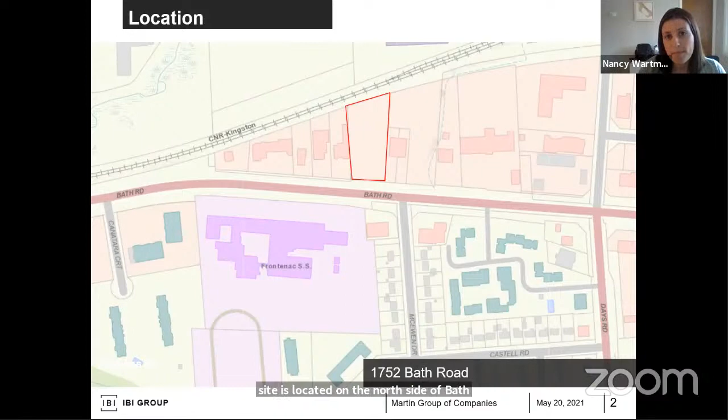In terms of the general area, north of the site is immediately the CN main line with industrial uses off of Development Drive to the north. To the south is Frontenac Secondary School, as well as some commercial and residential development. East and west along Bath Road is generally commercial, with some commercial having accessory residential within it, as well as residential further to the east and west.

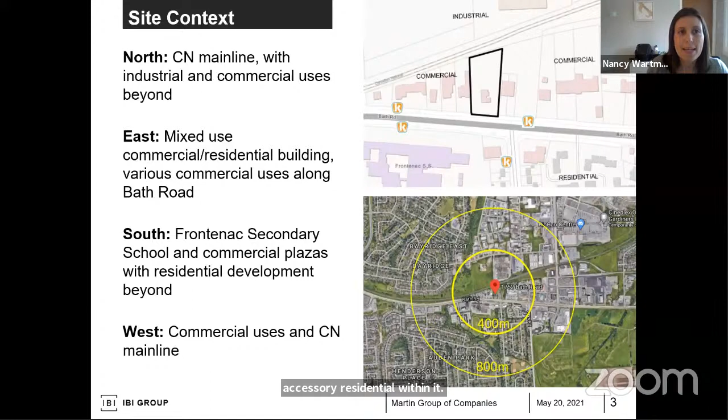This is an old aerial of the site, since the building has since been demolished, but it has an area of 0.6 hectares, about 50 meters of frontage on Bath Road. If you recall, it accommodated the McEwen Animal Hospital for a number of years.

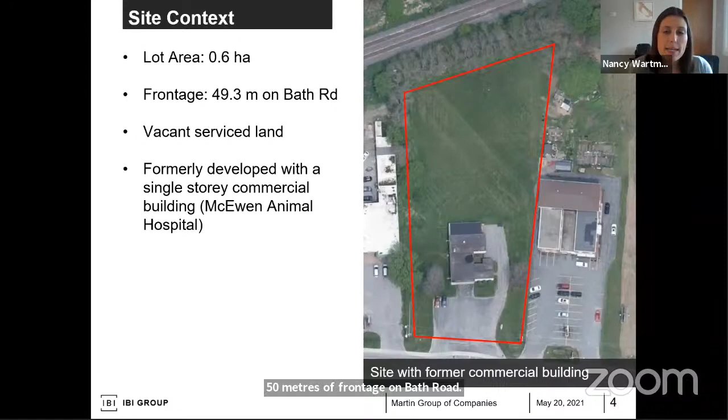The proposal we are looking at this evening is to construct an 8-story apartment building with 88 units, intended to be a mix of market rental and affordable units. 100 parking spaces are proposed in a surface lot, as well as an attached parking structure behind the building. The parking structure is intended to have a garden terrace on the roof, as well as common indoor amenity areas and private balconies. Due to the proximity to the CN main line, there is a safety berm proposed at the rear of the property as required by CN.

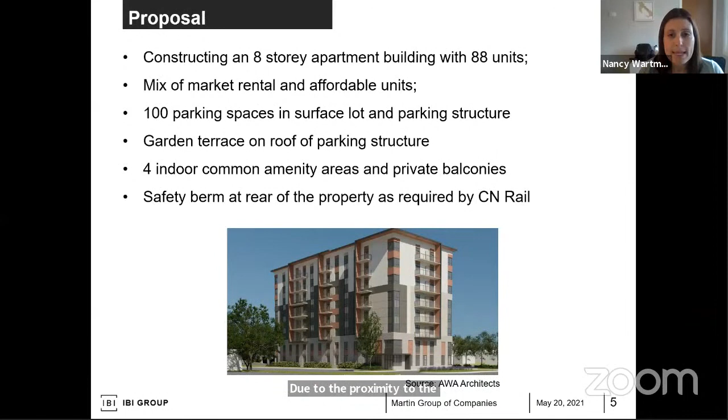In terms of amenity space, we're meeting the zoning requirement of 18.5 meters squared per unit. Landscaping on site will be 41%, lot coverage 30%, parking ratio of 1.15 per unit, and an indoor bike parking storage room with 30 secure spaces is proposed within the building.

I know there was some chatter before the public meeting started with the councillors looking for some more information on the proposed affordable housing component. So I'll provide you with what I know, and after my presentation, if there's further questions, hopefully myself and Andrew can do our best to address them. But the project goal is to successfully bring affordable housing units to the market in the city of Kingston.

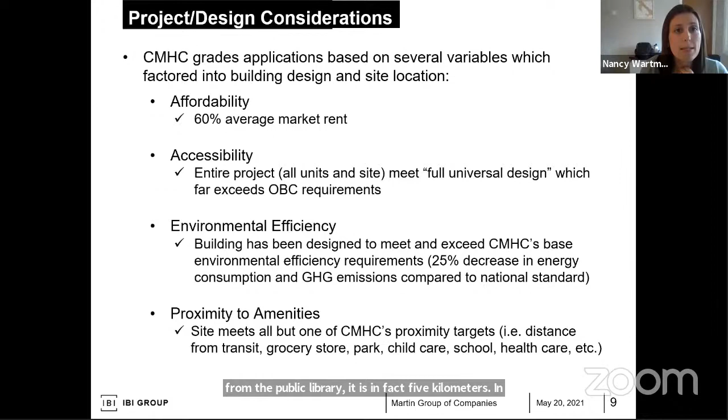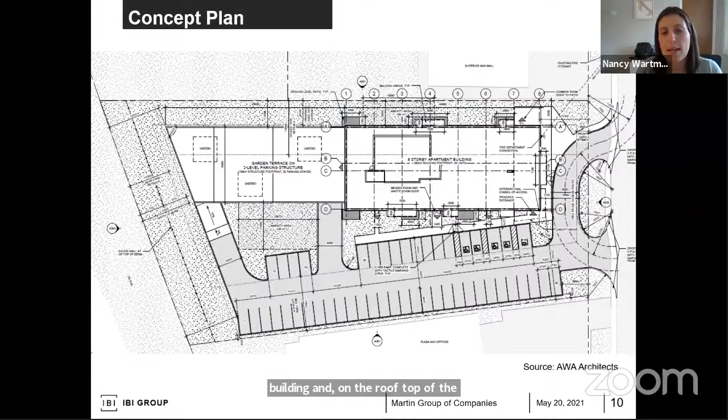Moving now to some more of the planning details in the concept plan. You have Bath Road on the right-hand side of your screen, and the CN main line right of way on the left-hand side. You've got your 8-story apartment building with access off of Bath Road. There's a surface parking lot in the west side yard, as well as a 2-level parking structure located behind the building. On the rooftop of the parking structure there will be a garden terrace for use by the residents, as well as additional indoor common amenity space.

These are the side elevations of the building. There you can see the parking garage a bit better. Again, it will be located behind the building, so it won't be visible from Bath Road.

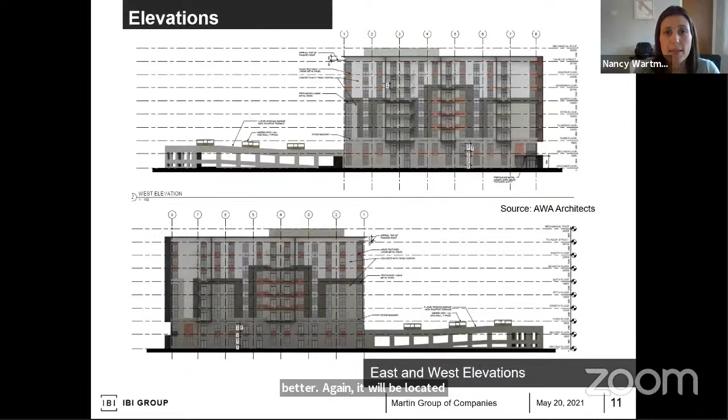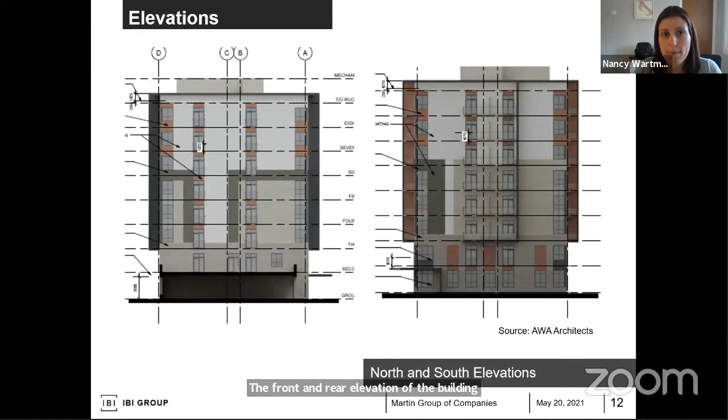As part of the planning report, we did complete an urban design review looking at the development in relation to the design guidelines for residential lots prepared by the city. The apartment creates a more defined urban environment in the area. The design is supportive of CPTED principles, or safety principles. As I mentioned, it will be universally accessible. The height and massing are similar to nearby development.

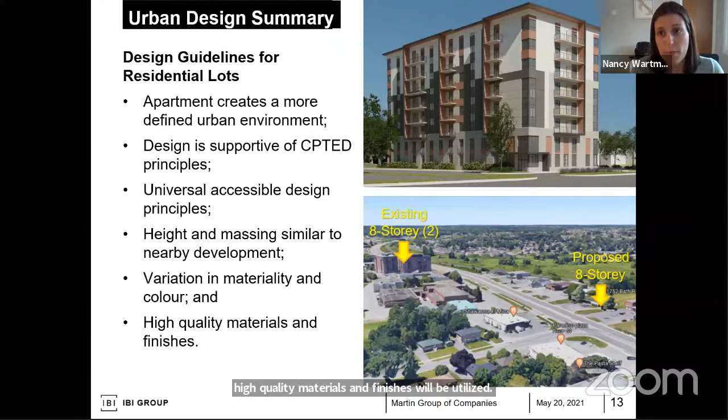The second image identifies, if you're familiar with the area, 2 8-story buildings just west on Canatera Court, as well as a large number of residential buildings up at the intersection of Bath Road and Gardiners, as well as other multi-story residential along Days Road. As you can see in the rendering, there is a variation in materiality and color, and high quality materials and finishes will be utilized, with part of that being required to meet the building efficiency requirements that Andrew's hoping to meet for CMHC.

We're requesting a zoning bylaw amendment to permit the multifamily apartment dwelling and to establish site-specific performance provisions for it.

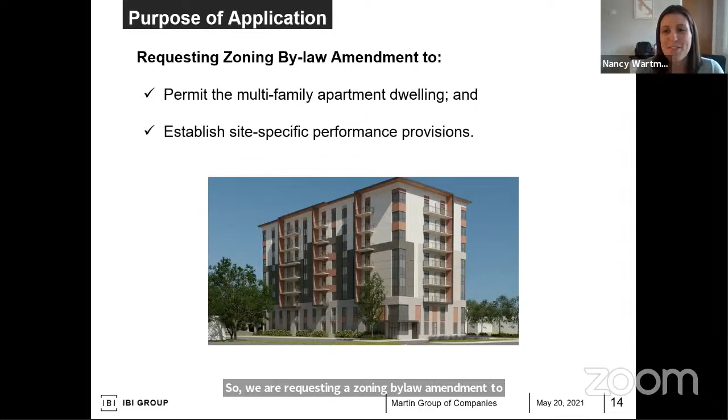The planning application needs to be consistent with the intent of the 2020 PPS. In this case, it redevelops an underutilized site in an area intended for development. It's within the urban growth boundary. It efficiently uses land and resources, does not result in uneconomic extension of services. It's compatible with adjoining uses as demonstrated by the accompanying technical studies, and no public health and safety issues are anticipated.

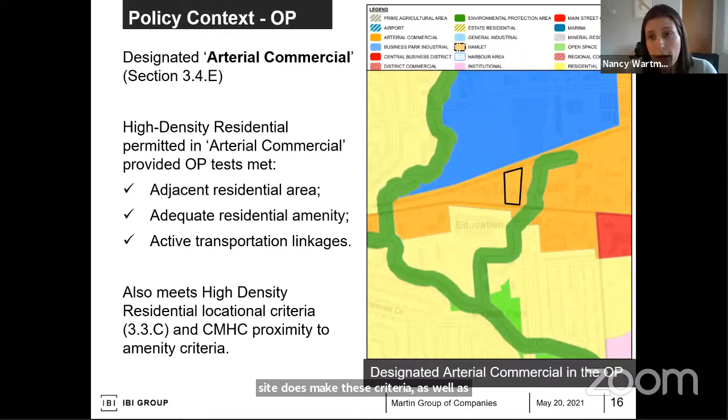Moving now to the local City of Kingston OP, the site is designated arterial commercial. High density residential uses are permitted in the arterial commercial designation, provided the tests of the OP are met, with the test being adjacent to residential area, adequate residential amenity, active transportation linkages, and as outlined in our planning report, the site does meet these criteria, as well as the high density residential locational criteria and the CMHC proximity to amenity criteria that I described earlier.

Just looking at some of the OP policies specifically, the site is compatible with adjacent uses. It is south of the industrial area off of Development Drive, but it does meet the ministry's D6 guidelines for residential uses and the minimum separation distance.

Utilizes mitigation measures as described through the noise study that will be required to ensure compatibility. There are a mix of commercial and residential uses along Bath Road, including accessory residential within some of the commercial buildings. Mitigation measures are utilized as necessary.

A detailed noise study was completed. And actually, even prior to submission, there was extensive back and forth with the City of Kingston, and it has already gone through a peer review process, or an initial peer review process. And as we move through the technical review process, it will obviously be reviewed in greater detail as well.

The site meets the needs of its users, and it does satisfy the special needs facilities policies outlined in the OP. As I mentioned, based on who the previous partnership was with, the proposal would fall into this description. So in the event that another organization comes through with similar goals, we still speak to the policies.

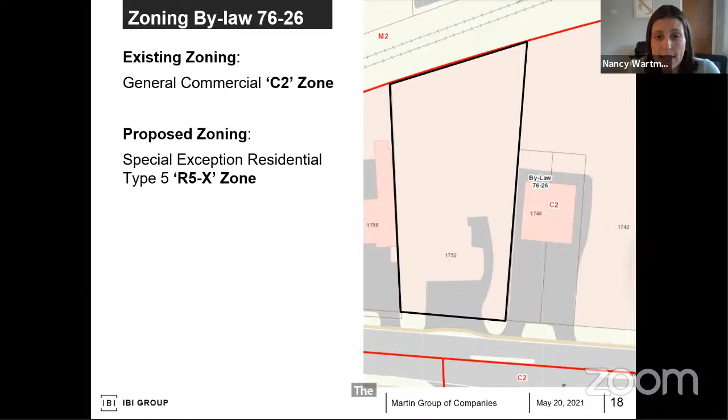Some of the standards that we've requested to amend within that new R5 zone is to permit the proposed community support office, reduce the minimum required lot area, which is on a per unit basis, a reduced east side yard setback, a reduced setback from the CN rail main line, a reduced parking ratio from 1.25 to 1.15, adjustment of yards where parking is permitted, as well as privacy yards, existing driveway widths, and to increase the permitted projection for balconies into the east yard, given the reduced setback proposed.

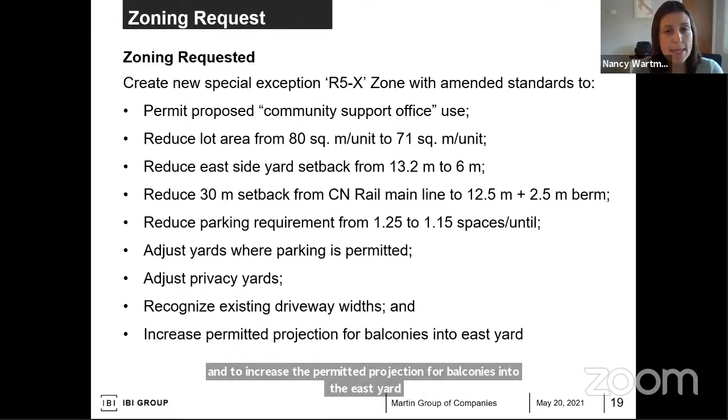So just to generally summarize and speak to some of the reasons that the requested relief is appropriate: the Arterial Commercial designation does permit residential development. The relief for the community support office has really been incorporated for clarity.

With the office being located on the second floor, it will just be one of the units that will then be converted to meet the needs of the organization who's operating. The lot area is sufficient to meet the needs of site users in terms of setbacks, unit sizes, parking, amenity, and safety. The east side yard and balcony setbacks are appropriate given the suburban/commercial context, and they are still a sufficient size to accommodate landscaping and access to that part of the property.

The CN rail setback, which is 30 meters in this case, because we have the parking garage at the rear part of the building, hence the request to reduce down to 12.5 meters. However, the residential component is greater than 30 meters - I think it's actually 48 and a half meters, which actually exceeds the requirement by CN. This has been reviewed with CN, and as necessary, the safety berm will still be installed.

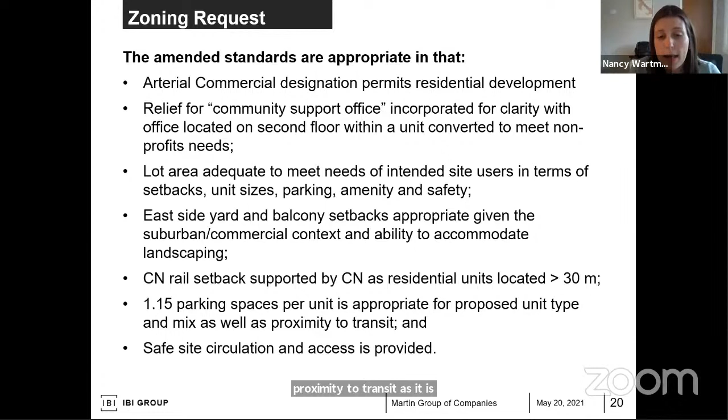So to summarize, the requested amendment is appropriate in our opinion, as it's consistent with PPS policies, conforms to the intent of official plan policies, and is compatible with surrounding land uses. It's our opinion that it represents good land use planning and is in the public interest.

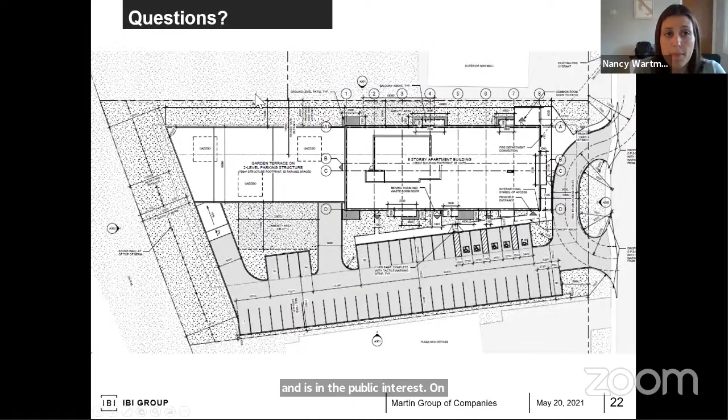On that note, if you want to go to the next slide, I'd be happy to answer any questions from the committee. And as mentioned, Andrew's here as well, and he may chime in if there's something he's better suited to answer.

Thank you very much for your presentation. Before we go into the committee, I'll just ask for, I believe it's Mr. Park, but whoever the city planner is, to comment on the public information notices.

Yes, Ms. Grant. Hi, Mr. Chair, can you hear me okay? We can indeed. Perfect. So just to confirm that notice was provided on this application in accordance with the requirements of the Planning Act, which includes on-site signage, a mail out, and a courtesy notice in the paper. To date, we have not received any public correspondence on this application.

Thank you very much. I will now turn to the committee, and we'll give committee members an opportunity to ask questions at this time. And then at the end of that, we'll move to the public. So, any questions from the committee?

Yes, Councillor Hill. Well, I just want to start by congratulating Andrew for this project. This is great. This is exactly what we're looking for in our community, and I hope you're able to secure that investor, that partner that you're looking for.

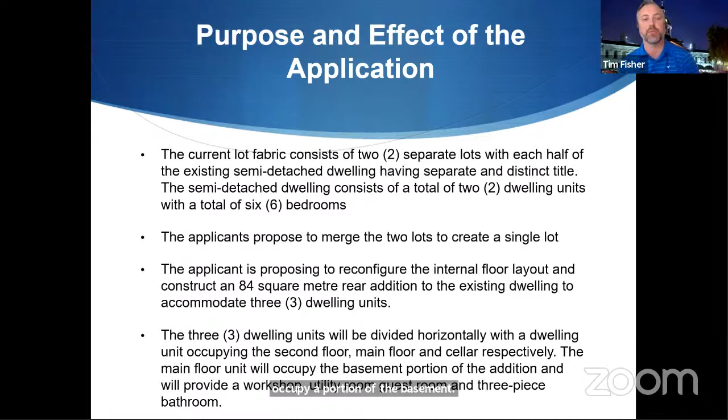Next slide. The proposal will consist of 3 units, with the basement unit containing 2 bedrooms, the main floor unit containing 3 bedrooms, and the 2nd floor unit containing 2 bedrooms, for a total of 7 bedrooms in the new structure. The proposed 3-unit dwelling will increase the total bedroom count from 6 to only 7 bedrooms.

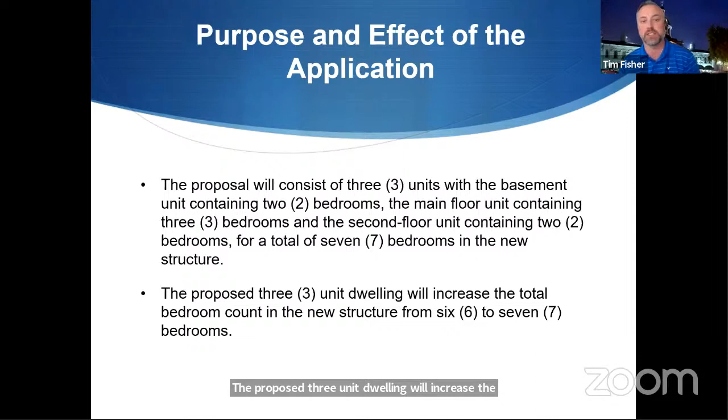Next slide. The proposal will comply with the performance standards of the 1 and 2 family dwelling A5 zone in zoning bylaw number 8499. However, a 3-unit dwelling is not a permitted use in the A5 zone. So the applicant is seeking a site-specific A5 zone, which will permit a 3-unit dwelling as a use and recognize the existing lot area of 107 square meters for the 3 dwelling units.

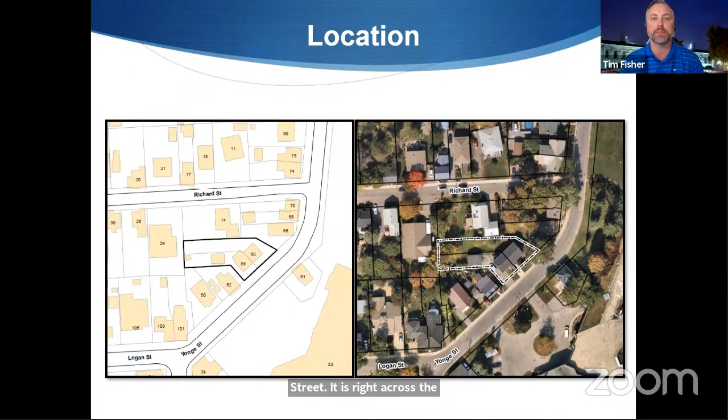Next slide. The location of the property, as you can see, is along the northwest portion of Yonge Street. It is right across the street from Portsmouth Olympic Harbor and just a stone's throw away from King Street West. It is located on the outskirts of a residential neighborhood, which consists of quite a mix of residential housing, from one-family to two-family dwellings, all the way to row housing, and also apartment complexes within the area.

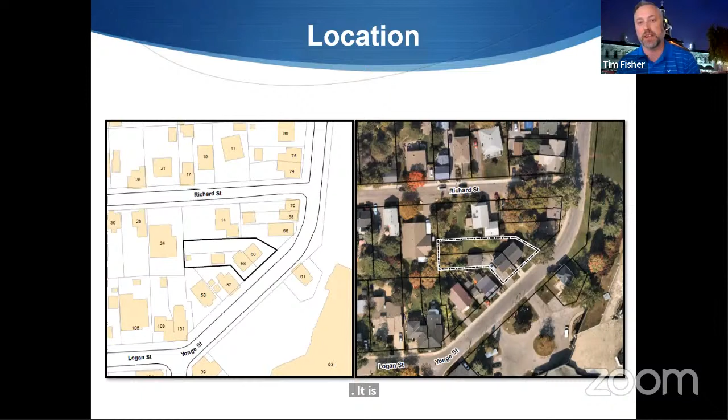So the official plan: the subject property is designated as residential, as with the residential uses around it, and across the street at Portsmouth Olympic Harbor it is Parks open space. Next slide.

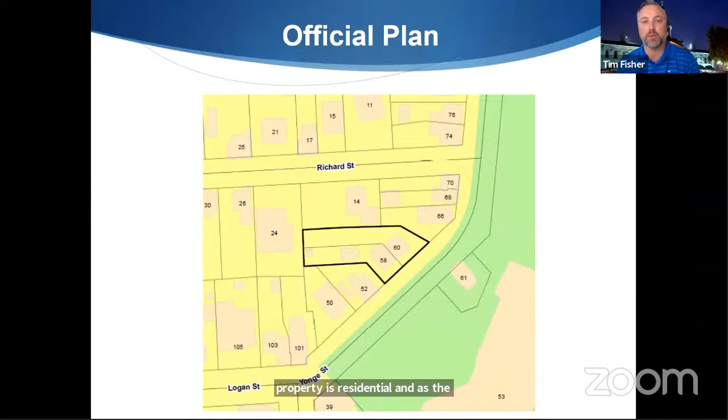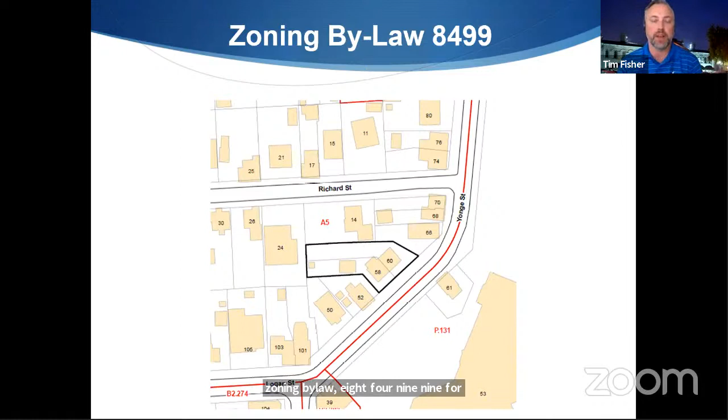Under the current zoning bylaw, which is 8499 for the city, the subject property and the surrounding properties are in the A5 zone, which is a 1 and 2 family dwelling zone. Next slide, please.

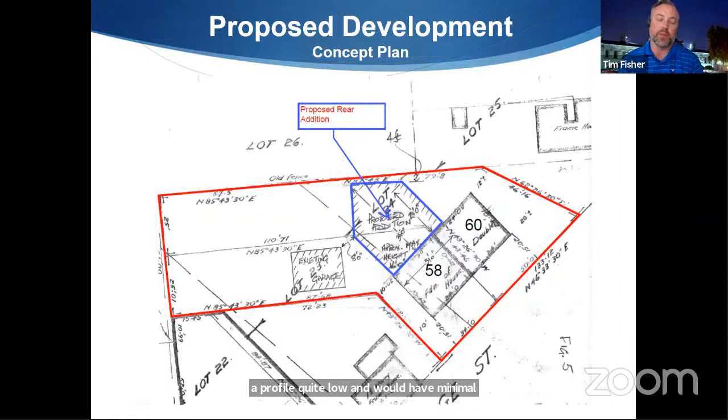So for the proposed development, the concept plan: as you can see, the red outline is the property line of the combined properties, and the blue area is where the proposed addition would be located. As you can tell, the addition will be at the rear of the dwelling, so it will not be viewable from the street. The streetscape really would not be changing in this case. The addition will be limited to a 1-story addition, which would keep a low profile and would have minimal impacts onto the adjacent uses and also the continued residential uses or their future development as well. Next slide.

So the existing floor plans, as you can see on the main floor and second floors, again, your typical residential unit. You've got your living space on the first floor and your bedrooms and bathroom on the second. Next slide.

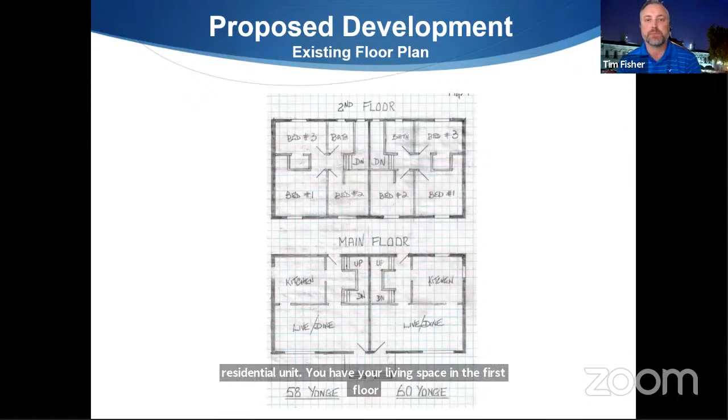Next slide. So the second floor plan is only the existing upper floor of the existing dwelling. Again, the addition is only going to be a single story, so there's no additional second story living space on the addition. Next slide.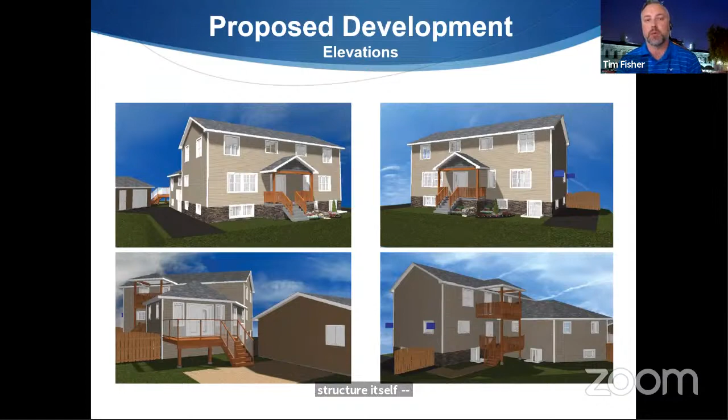I can also say that the proposed addition and structure itself, the massing and the proposed use, is in character with the existing residential neighborhood and its built character as well. Next slide.

During the public correspondence and the public meeting held on March 25th, 2021, there were only two questions brought up. One was whether there would be any trees removed on the site. The applicant responded that there may be the odd tree removed to accommodate the addition, however his intent is not to have any major vegetation removed. There was also a general question regarding the deck at the back, and they wanted to see the deck profiles themselves.

So the zoning provisions proposed to be altered here would be the permitted uses under section 11.2, which currently only permit a 1-family and 2-family dwelling. They are proposing a multiple family dwelling containing 3 units.

In doing so, we should be recognizing the square footage, or square meters of lot area, for each individual unit as defined in section 11.3E, which requires each unit to have a minimum lot area. In this case, we're looking at 269 square meters for each individual unit, which would accommodate the 807 square meters that the subject property would be.

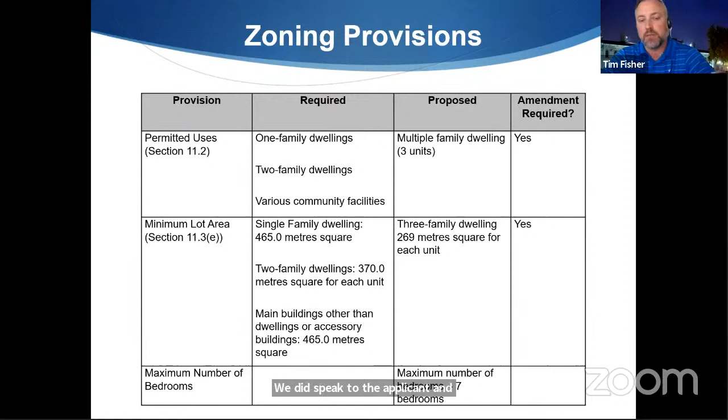The planning department would recommend providing a maximum number of bedrooms of 7 in this case to reflect the applicant's proposal. We did speak to the applicant, and he was in favor of this limitation for this development. Next slide.

The proposed 3-unit residential development is appropriate and adds a range of built form and dwelling unit sizes available in the area. The proposal contributes to increasing the total residential density within the urban boundary. The proposed zoning bylaw amendment complies with the provincial policy statement, the official plan, and constitutes good land use planning. Staff recommends approval of this application for zoning bylaw amendment for the property.

If this application to rezone the property to a site-specific A5603 zone is approved, the applicant is then required to obtain a building permit prior to the commencement of any work. I will leave this in your hands, and I'm here to answer any questions that you have.